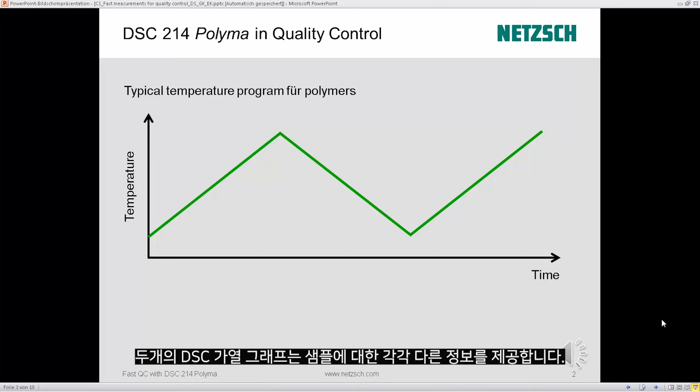For this, the typical temperature program includes two heatings. The DSC curve of each heating provides different information about the sample. The first heating gives an indication about the thermal history of the polymer. What temperature was used for processing? How was it cooled after processing? How was it stored? How high is the degree of crystallinity?

Cooling has to be carried out at a controlled rate so that the sample gets a specific thermal history at the beginning of the second heating. This allows for identification of the tested polymer in the subsequent heating. The results of the second heating are important in quality control, where the delivered material has to be checked prior to its processing. This answers the questions: is the polymer the correct one? Is it pure? Does it contain contamination?

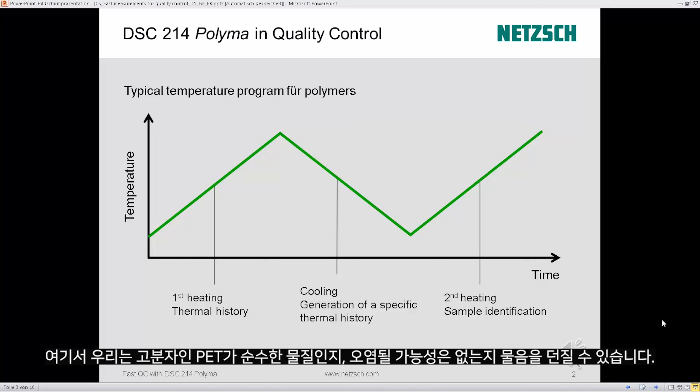Let us start with the DSC measurement on polyethylene terephthalate, better known as PET. Here, the sample was heated twice over the melting peak at 20 Kelvin per minute. Cooling was also carried out at 20 Kelvin per minute. The continuous line represents the temperature signal as a function of time. The DSC curve, presented in dashed lines, shows different effects during the first and the second heatings.

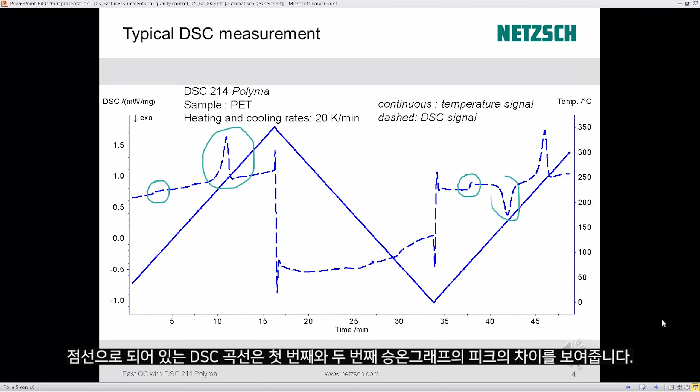Here, both heatings of the PET measurement are temperature scaled. During the first heating, the glass transition and the melting peak of PET were detected at 86 degrees and 245 degrees, respectively. During the cooling at 20 Kelvin per minute, the polymer didn't have time to crystallize. This leads to a bigger step of the glass transition in the second heating and to a crystallization peak found at 163 degrees.

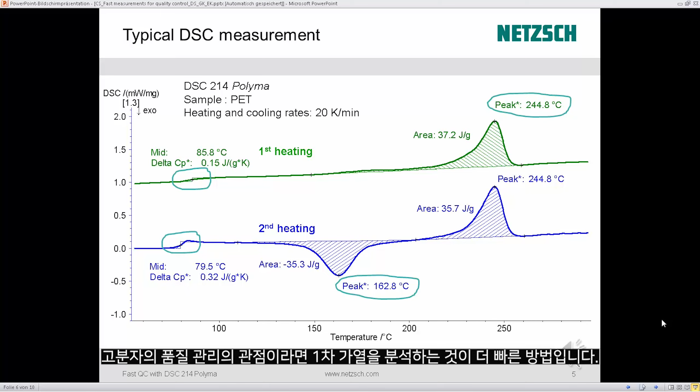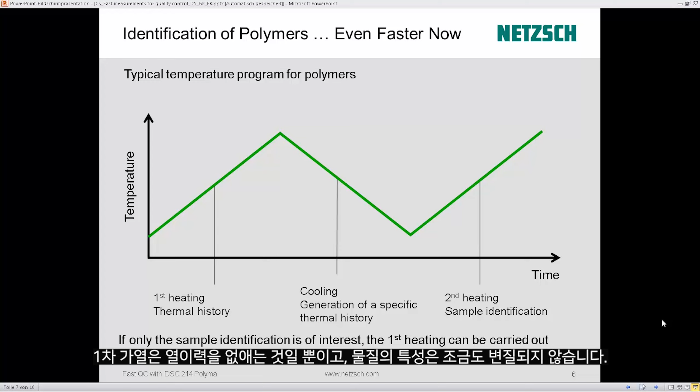If you are interested only in the identification of the polymer, then you can carry out the first heating faster. Actually, the results of the second heating are only affected by the cooling rate of the previous cooling and not by the measurement conditions of the first heating. This is, of course, true if the first heating is carried out over the melting temperature of the material to allow for completely erasing its thermal history, but without any degradation. Running the first heating faster leads to shortening of the measurement time and thus a higher sample throughput.

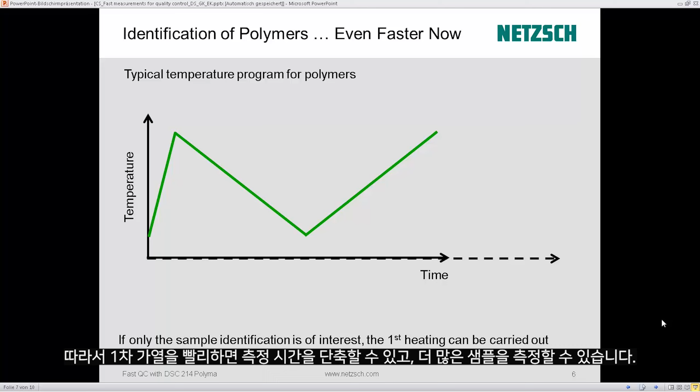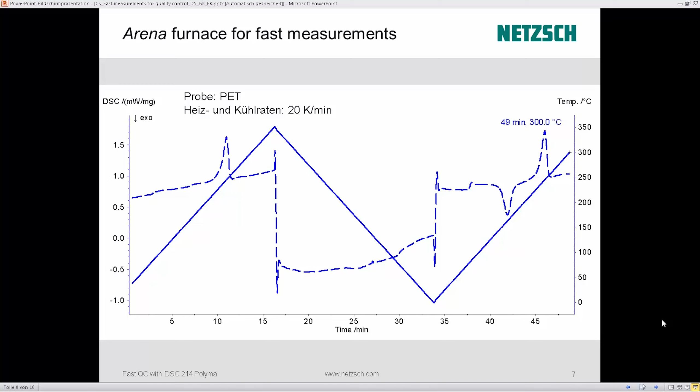When we get back to our PET example, our measurement carried out at 20 Kelvin per minute took 49 minutes. The DSC 214 Polyma can be operated at much higher heating rates thanks to its Arena furnace, a furnace of small thermal mass. Here, carrying out the first heating at 200 Kelvin per minute results in a reduction of the measurement time of 30%.

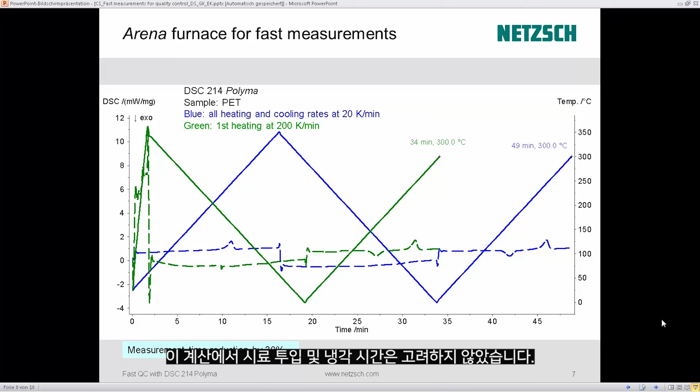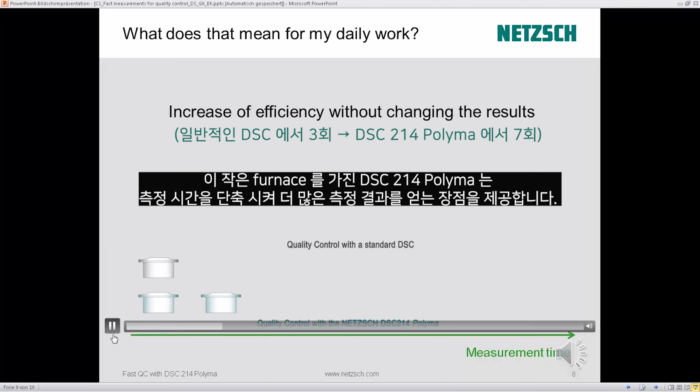This calculation only takes the measurement times into account and not the cooling times between two measurements. Due to its small furnace, the DSC 214 Polyma allows for saving plenty of measurement time. The more samples you have to measure, the more time advantage you gain with this DSC.